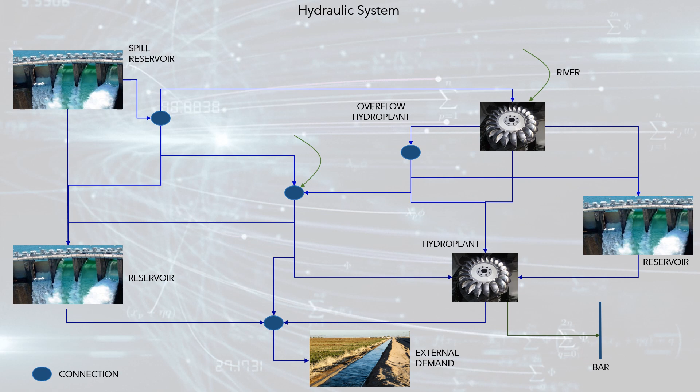Hydroelectric power plants are modeled independently of reservoirs, so plant-reservoir connectivity must be established. The regulation capacity of the reservoir is simulated in detail, so such a simulation consistently represents the dispatch of the power plants, considering their ability to regulate the multi-annual, annual, and hourly water resource.

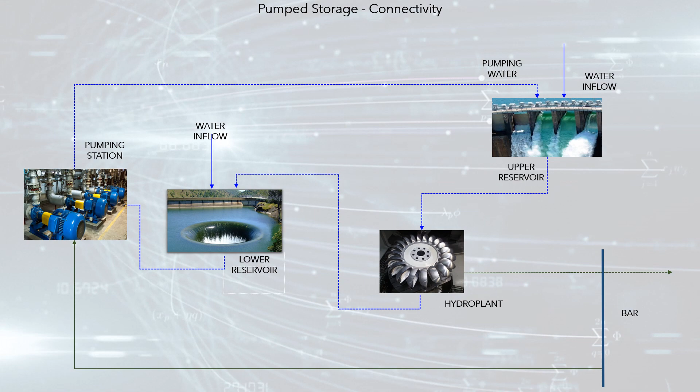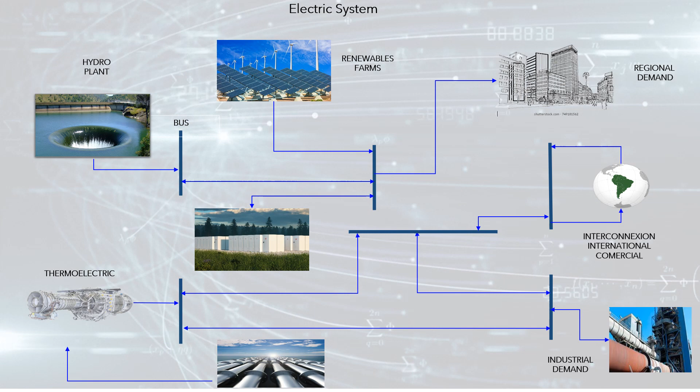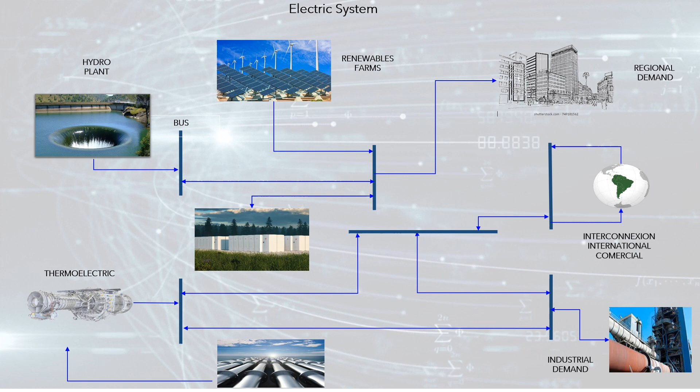Electric system physical modeling. Electrical connectivity is carried out through a network of circuits and bars that integrates different types of installations: power plants, like hydroelectric, thermoelectric, coal, wind, solar, biomass; places of demand, like industrial, cities; regional interconnections and energy storages. High power includes the simulation of several types of renewable energy sources and energy storages. For each type of electrical asset, high power includes the exact equations for simulation.

Natural gas system physical modeling. High gas describes the process of supply and demand of natural gas. From this point of view, its integration with the electricity system determines the economic equilibrium of electricity-gas markets. The entities of the natural gas system are: nodes, which connect the gas system installations; production fields; consumption zones, discriminated by

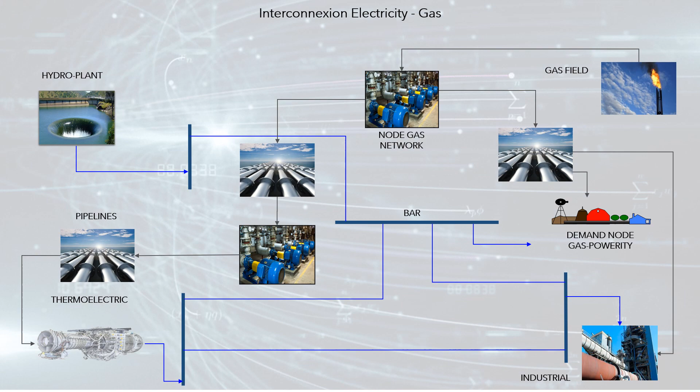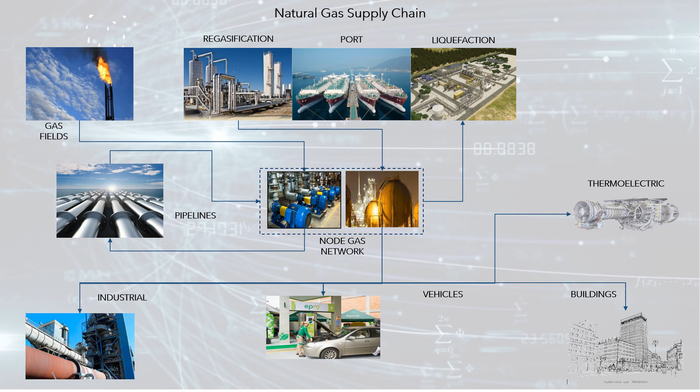sector, for example refineries, heavy industries, residential, vehicular, commercial, and thermoelectric power plants; transport systems, pipelines, and multimodal transport systems using vehicles; pumping stations, which compress the gas to transport it; and ports, which receive and ship liquefied natural gas, LNG, and have gas storage capacity. Connectivity between the electricity and gas sectors occurs through the demand for natural gas for use in thermal plants, and the substitution of demand that can occur between gas and electricity.

Electricity system and wholesale market mathematical models make up a flexible decision support system that provides different types of services in an integral way. They can be classified into integrated dispatch of generation plants, optimization of generating agents, and predictive analytics of stochastic processes.

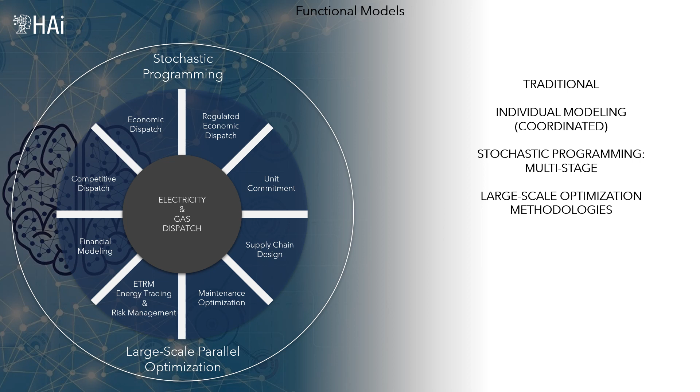Traditionally, the optimization models in the electricity sector consider individual modeling with exogenous coordination between models, based on multi-stage stochastic programming, and using large-scale optimization methodologies. The differences with the state-of-the-art modeling provided by high power are integrated holistic modeling, scientific risk modeling, multidimensional uncertainty, parallel optimization, and autonomous real-time distributed optimization.

Three types of connectivity of the generation system and the transmission power grid are considered: ideal single node, ideal dispatch ignoring the transmission system; electric transmission network connectivity, based on the detailed connectivity of the electricity transmission system using bars and circuits.

Operative areas connectivity, when the user does not have, or does not want to use, the detailed configuration of the electricity transmission grid. It is possible to use the connectivity based on operational areas.

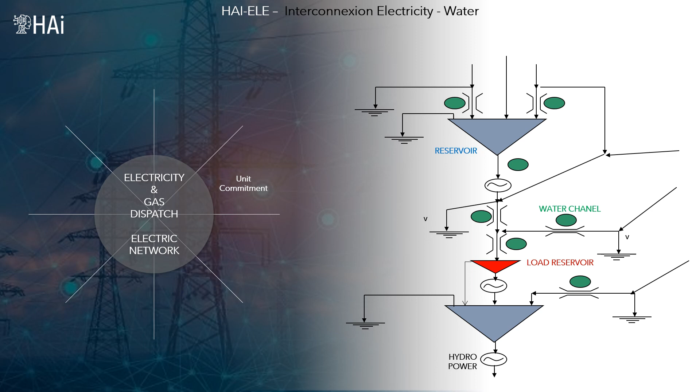These equations give rise to variations of the model according to the techno-economic concepts that support a specific modeling. There are at least 4 types of economic models to represent the electricity and gas market: economic perfect dispatch, EED; economic regulated dispatch, ERD; Nash-Cournot equilibrium dispatch, NCD; and unit commitment, UC.

The EED is the core model of high power, as its equations/constraints are used in multiple specific models that the agent requires to address decision support needs. EED and the UC models optimize the dispatch of generation infrastructure, minimizing the cost of operating the electricity system, which simulates a perfect electricity market. The differences between these two models are the detail of modeling. EED is oriented to planning and UC to real dispatch.

Economic regulated dispatch: delivery of plants that minimizes the cost of operation of the interconnected system and includes representative aspects of the regulation of the electricity market being simulated. It does not correspond to a model of economic equilibrium; however, it is an easy and fast way to represent regulatory considerations based on optimization models.

Nash-Cournot equilibrium: dispatch of plants oriented to the simulation of competitive electricity markets with agents that can influence with their decisions on transactions occurring in the market. It can be used to, among others, project the dispatch of a competitive market and study the exercise of dominant market power of agents.

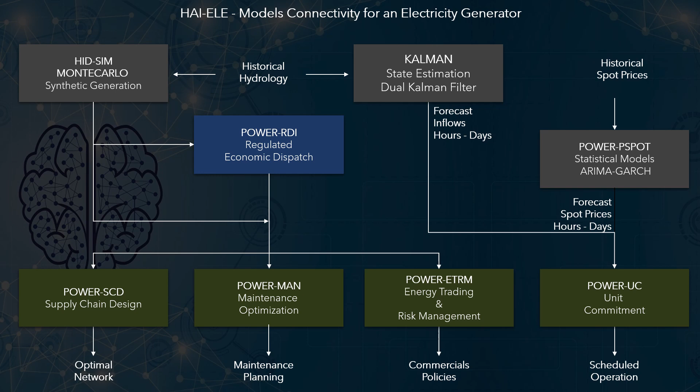4 models are considered fundamental to support the strategic, tactical and operational decisions of an agent that operates generation plants. The diagram presents the design of an integrated set of mathematical models to support the decision-making of a generator agent. Electricity dispatch and financial analysis: integration of dispatch models with assets liabilities management, ALM, financial models including risk management, to perform analysis of the financial impact of decisions.

The main applications are the valuation of income and expenses of investment projects, energy installations, and valuation of energy companies, and integrated optimization of investments by global energy companies, taking as a reference the regulatory laws of the different regions or countries. The financial modeling results individualize the operating income and expenses, and can include all types of legal accounts.

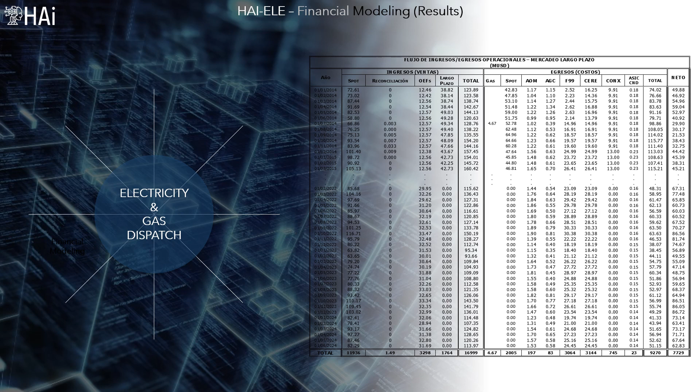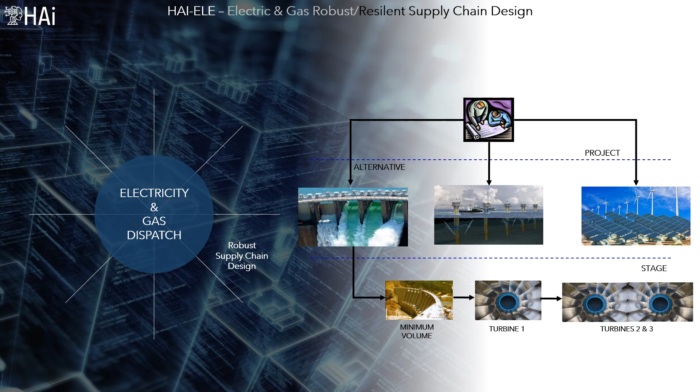Electricity supply chain design and risk management, associated with strategic planning decisions related to resilient design of the supply chain, in relation to capacity of reservoirs, transfers, power plants and other assets of an electrical system. It may include risk management and financial planning.

Energy trading and risk management: optimal decisions related to energy trade and coverage of financial risks based on standardized or non-standardized bilateral contracts. It corresponds to a set of mathematical models aimed at supporting the decisions of the different agents involved in energy trading in the long-term market, spot market, and secondary markets.

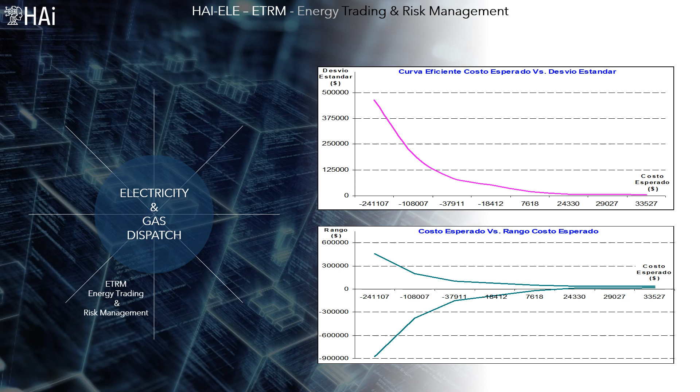The result of a risk analysis is the definition of Pareto curves of risk versus expected cost, based on which the decision maker must define the risk position he wishes to assume, varying between risk-prone and risk-averse. Maintenance optimization is oriented to policy making for preventive maintenance of multiple central generation plants and other electrical assets. It can be applied to all assets in a regional or national grid.

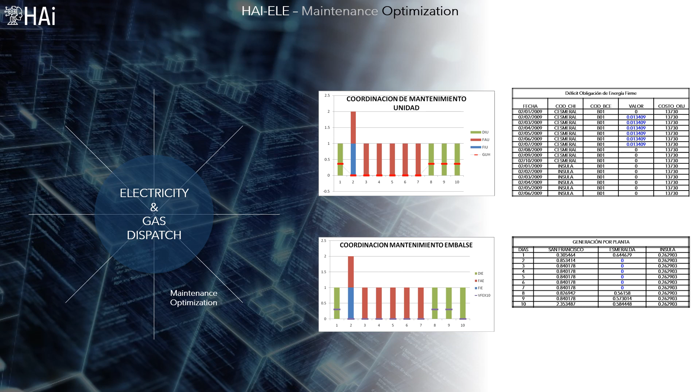High power can be implemented following the principles of PHM, prognostics health management, for industrial asset maintenance, integrating specific models of predictive analytics for asset components and prescriptive analytics to optimize the integrated operation of the asset network. High power has been used by ISO, in Peru, and Market Supervisor, in Colombia, for planning and decision-making purposes.

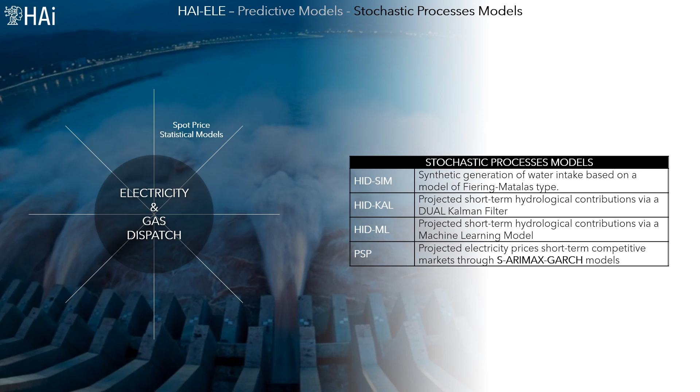High power includes some predictive analytics models. Spot price modeling: the prediction of spot prices of the energy market is fundamental for the decisions made by an agent that participates in that market, whether buyer or seller, generator, trader, or distributor of energy.

This is because the decision maker requires that the model's results that produce spot prices be used in other mathematical prescriptive models. The mathematical models to be used depend on the planning period, short, medium or long term, and the type of market considering the dispatch of the plants, by mathematical model, or by market agents' offers in a free market. In free markets the situation is complex since the law of price formation cannot always be explained based on mathematical rules, explicit, clear and universal, that may integrate a mathematical model.

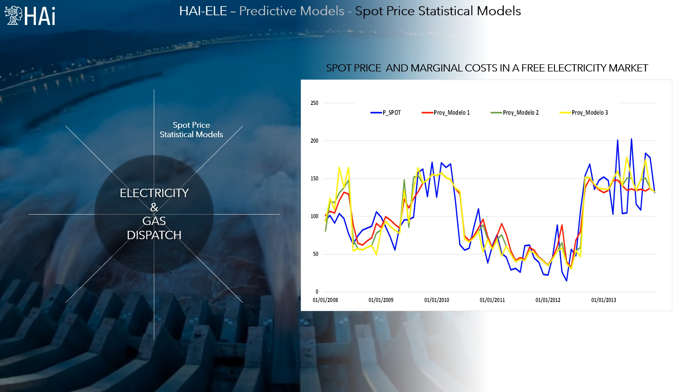Synthetic generation of renewable energy sources. For the generation of synthetic scenarios of climate variables, there are two requirements: short-term, hours, days, and medium/long-term, weeks, months. Specific short-term models must be built for each renewable source. For the medium and long-term, there are three alternatives to generate synthetic scenarios.

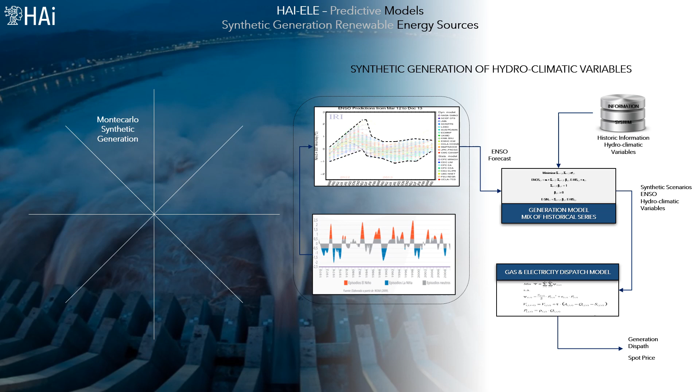Smart grids optimization models. In a regulated environment, generation, transmission, and distribution are operated by a vertically integrated enterprise, usually state-owned, which has a monopoly on the supply of electricity. Conversely, in a deregulated environment, different parts of the electricity grid are owned and operated by different actors, and electricity markets provide a platform that fosters competition among participants. As each smart grid is unique, it requires a specific decision support system that allows the operator to interact with the entire electrical system. HAI-SGO provides all the analytical elements necessary to configure the specific DSS that each case requires.

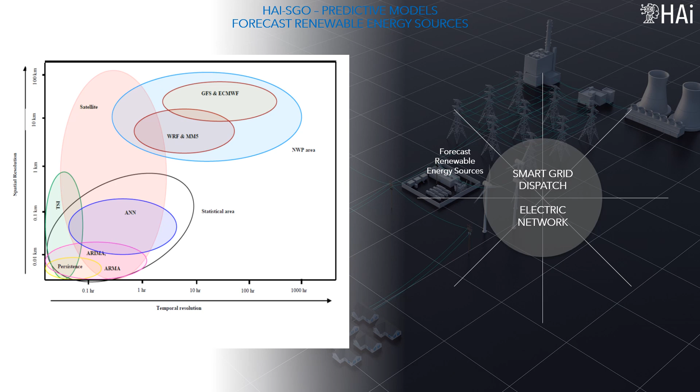Forecast renewable energy sources. They correspond to predictive analytics models focused on the prediction in the specific sites where the generation plants are located. Forecast of energy demand. Demand projections per years, months, weeks, days, hours. HAI-SGO is integrated by the following optimization models.

Economic dispatch of the smart grid, optimization of the management of electrical energy in small cities, factories, universities, shopping centers, office buildings, urbanizations. Smart grid unit commitment, optimization of the dispatch of the electrical load in real time, or in the short term. Smart grid configuration, optimizing the network topology. It considers voltage control, configuration of feeders, location or activation or reallocation of electrical assets, like transformers, capacitors, and phase balancing. Smart grid design, optimization of the design or redesign of smart grids with modern power technologies.

ETRM, electricity trading and risk management, decisions to buy and or sell electricity, in a long, medium and short-term market, one day in advance or the day of dispatch.

Industrial energy efficiency. The technical economic viability of energy storage coupled with the proliferation of energy technologies based on renewable energy sources has changed the landscape of the industrial sector, since it is now possible, and increasingly efficient, to generate renewable energy and store it for use in due time. In practice, all industrial companies can be agents that interact in the electricity market, acting as co-generators and carry out commercial activities and transactions. This, together with the industrial Internet of Things, increases the pathways to achieve industrial energy efficiency.

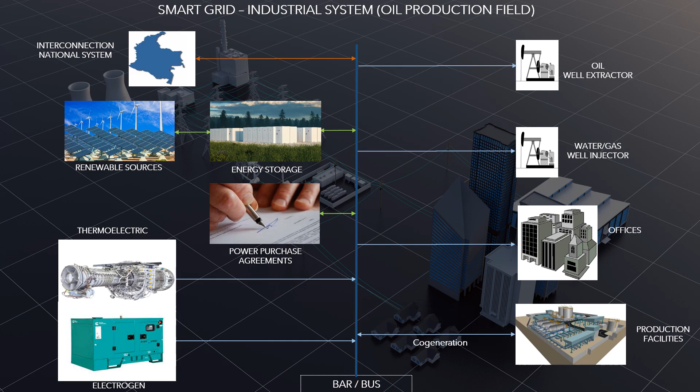Industrial energy efficiency results from the integration of production processes, transformation of matter, with industrial energy services, energy transformation, aimed at the simultaneous optimization of both industrial production and energy conversion that is related to polluting emissions of gases and liquids, associated with increasingly demanding environmental control laws. The high-power and HAI-SGO models can be integrated with complex industrial process models, in which it is necessary to redesign the power supply system according to the new power technologies. This type of model includes the simulation of polluting processes, for example, combustion in furnaces, to determine the optimal mixture of fuels in accordance with environmental regulations.

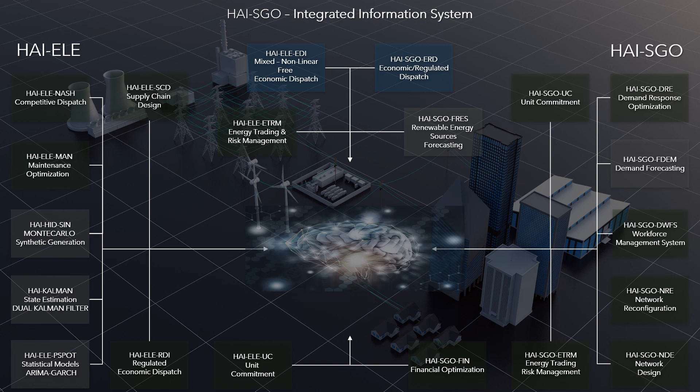High power and HAI-SGO integrate the models and information systems around a common data model. Like Herbert Simon, hypothalamus artificial intelligence believes that computer-based mathematical modeling is the greatest invention of all times.